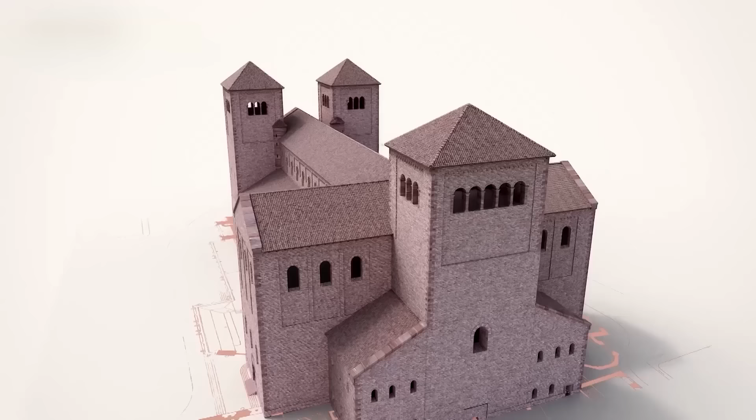After years of research, experts have been able to retrace in 3 dimensions the incredible history of this project, which took 4 centuries to complete. But how did the builders of the era defy the laws of physics to build higher and higher?

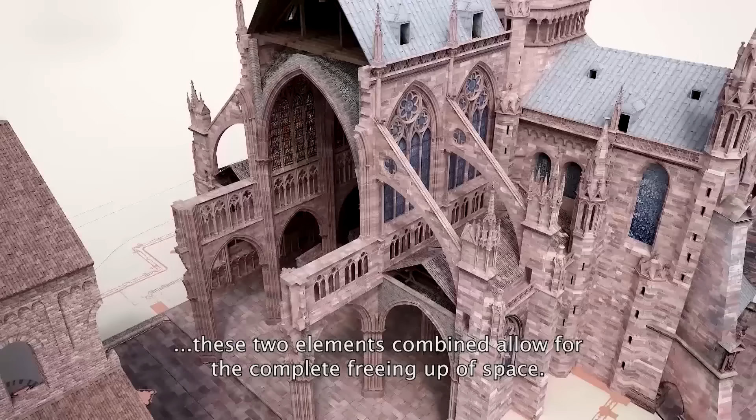And how did they attain this architectural precision without weakening the structure?

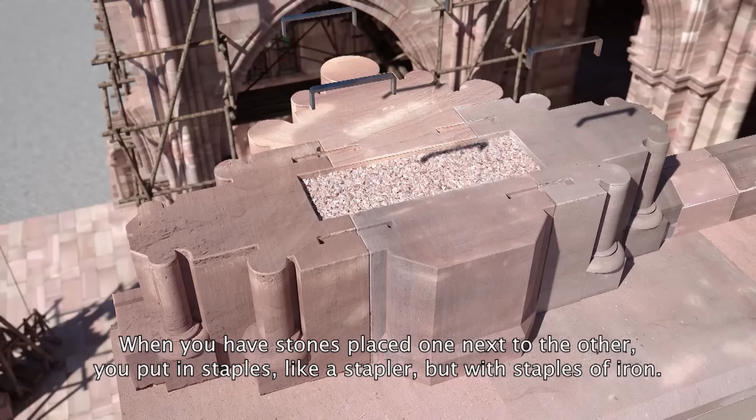The spire of this cathedral, which will come to dominate Europe until the 19th century, sparks the enthusiasm of researchers.

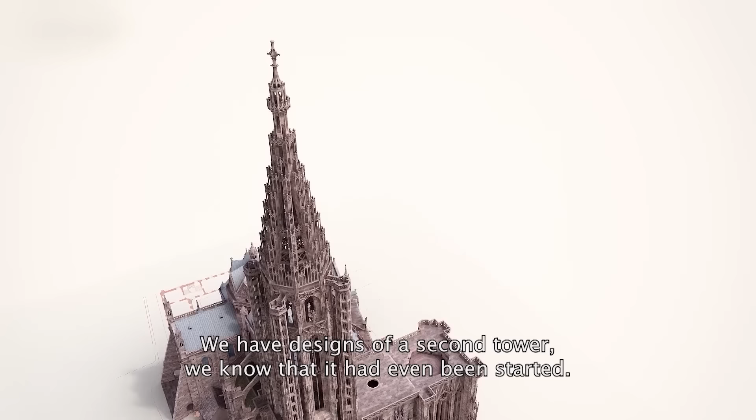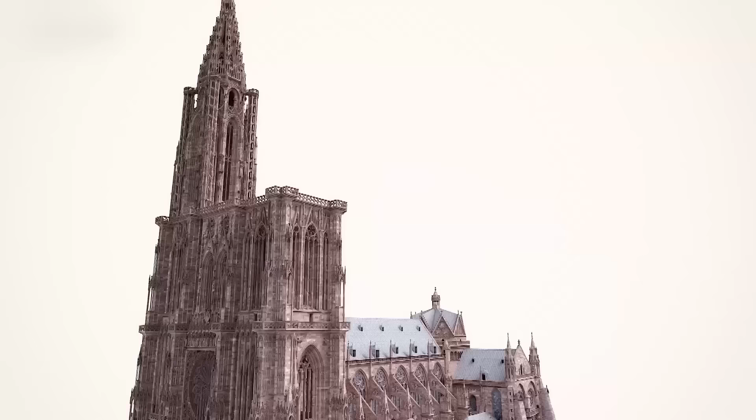Welcome to the Cathedral of Strasbourg, an exceptional project that took 400 years and enlisted the best architects of the Middle Ages.

A masterpiece of Gothic architecture, Strasbourg Cathedral is a one-of-a-kind monument.

Topped by its unique spire and adorned with a pink sandstone exterior, this cathedral has become the symbol not only of the city, but also the entire region.

Located on the border with Germany, the cathedral stands tall in the city centre, situated in one of the most historic neighbourhoods of the Alsatian capital of Strasbourg.

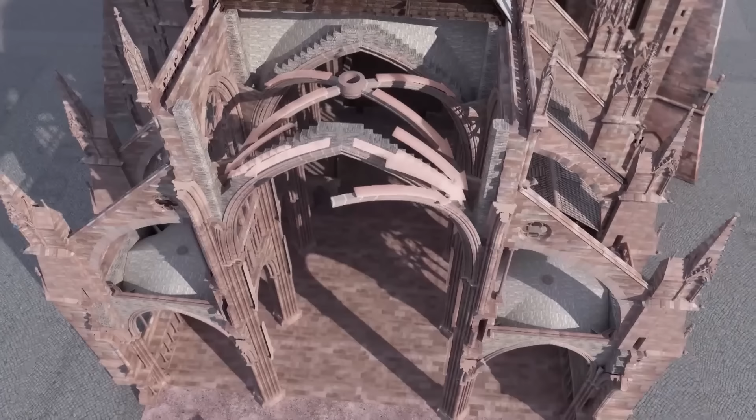To accomplish this, the weight of the building is directed to pillars supported at the exterior by flying buttresses and buttress walls. A real technological feat.

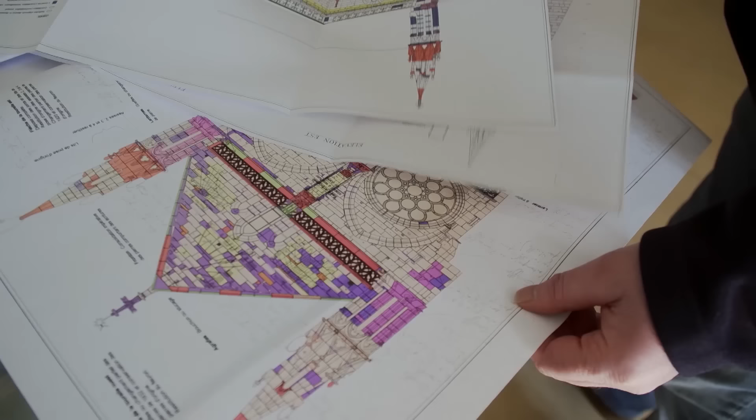Today, experts are trying to understand the construction techniques that were used in the Middle Ages to achieve such a feat. But the archives that would allow us to retrace the history of this project are lacking.

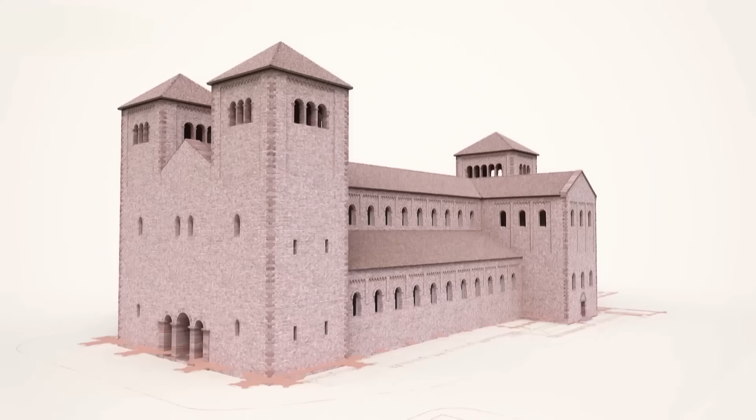With its thick walls and small windows, the original basilica was typical of the Romanesque architectural style, a rustic architecture that matches the technology and building techniques of the beginning of the Middle Ages, between the 10th and 12th century.

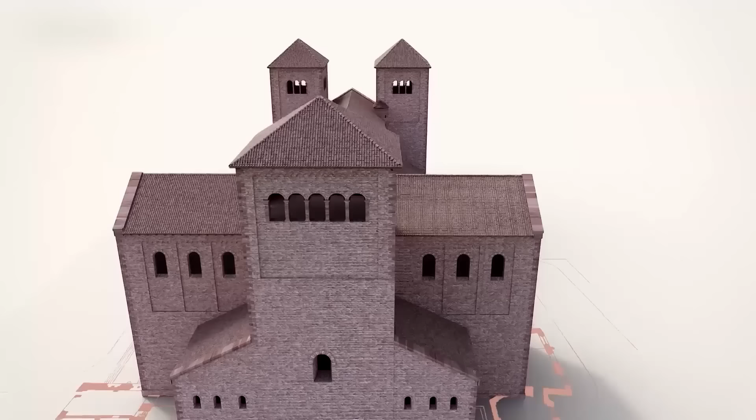But how did this original structure become the cathedral that we all know today? And above all, why was it transformed? The archives give us the beginnings of an answer.

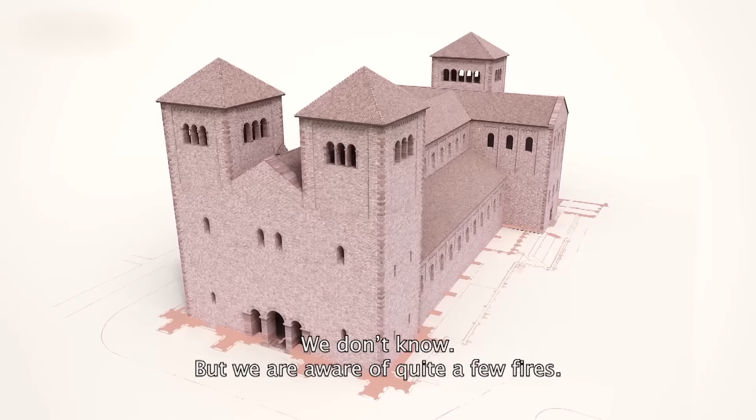The Romanesque cathedral is perhaps seriously damaged. In any case, it is decided to rebuild the building.

The project begins around 1180, and the first choice the builders make is to keep the existing foundations.

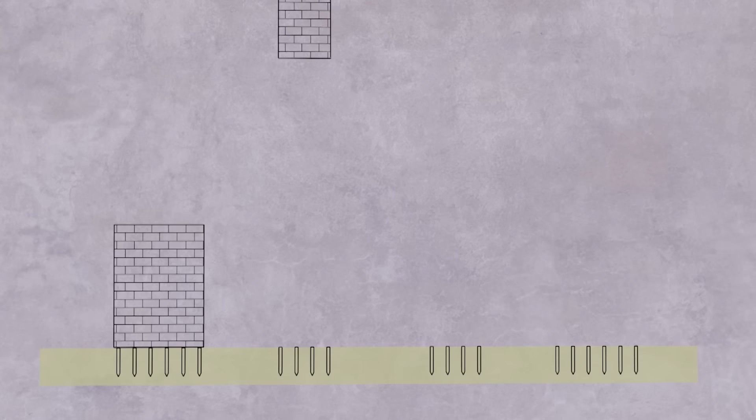These foundations are indeed colossal. Wooden piles were first driven into the underlying rock. To stabilize the whole thing, a layer of clay 2 meters thick was laid down. Finally, very thick foundation blocks were laid down. It is on these walls that today's cathedral rests.

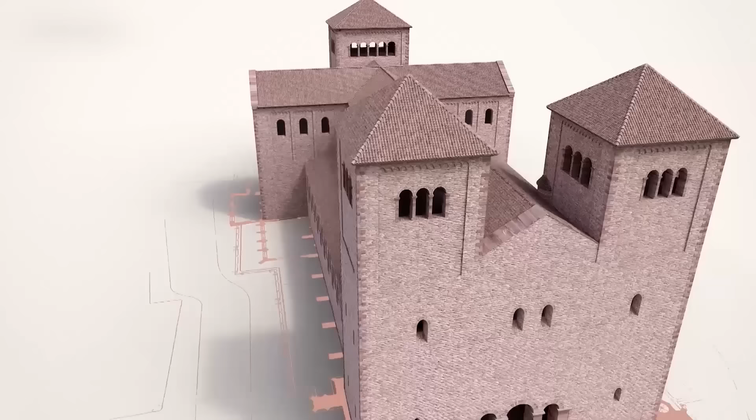The reconstruction of the cathedral began around 1180. The builders began on the north side of the transept. But at the same time, in France, Gothic architecture was in fashion, with its higher and more open buildings.

This style will dominate in the construction of the Cathedral of Strasbourg.

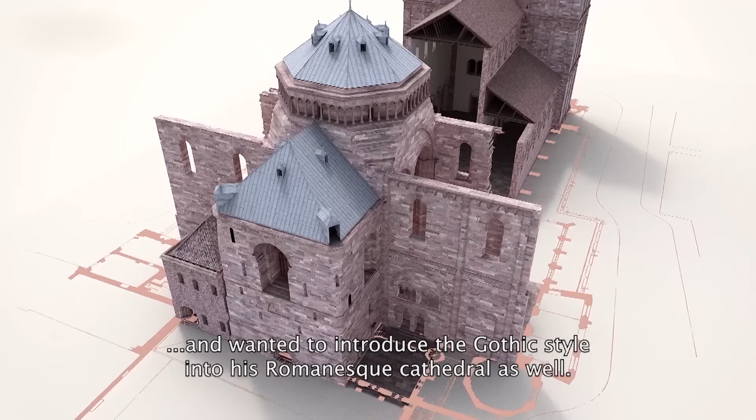The bishop called upon the best architects of his time. They come from France, where they had worked on some of the most prestigious construction projects, such as the cathedrals of Paris and Chartres.

Il faut bien comprendre que les architectes qui étaient appelés à Strasbourg, c'était les stars de l'époque. Les architectes étaient itinérants, ils voyageaient, ils étaient curieux, ils connaissaient, ils étaient dans des réseaux de maîtres d'œuvre, donc on partageait les connaissances, on volait le savoir de son concurrent.

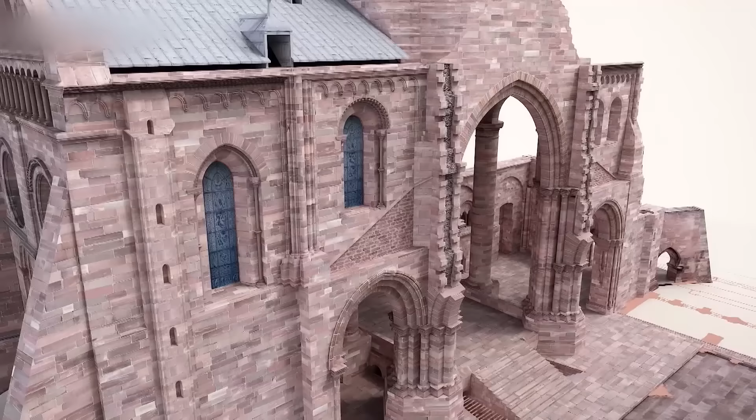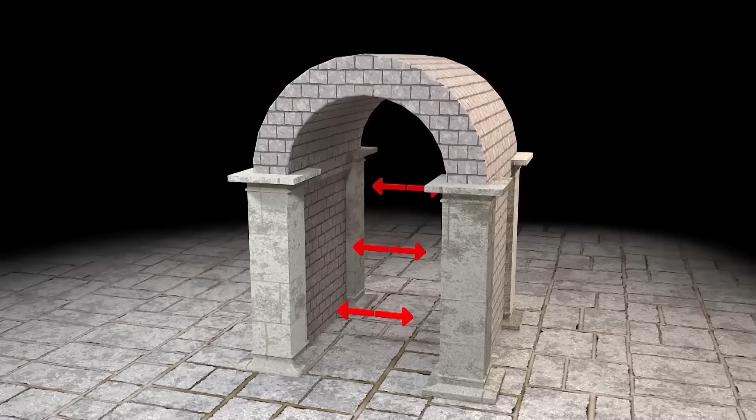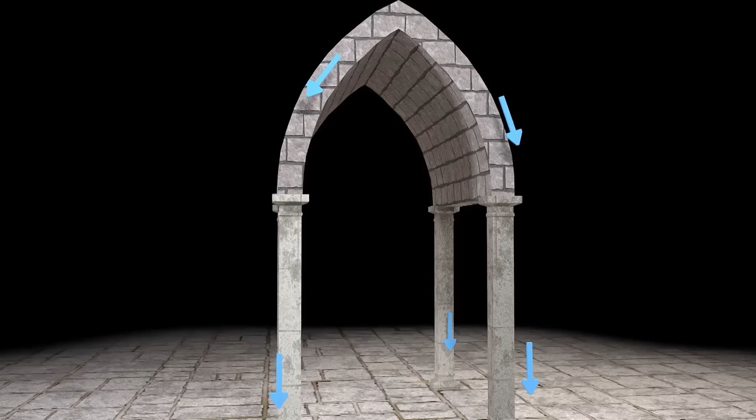These ingenious builders master the most advanced construction techniques, such as the rib vault. In the new cathedrals, the rib vault replaces the barrel vault, which was the only one known since antiquity. It is a real technical revolution. With its semicircular shape, the barrel vault exerts very strong force horizontally. Because of this force, the pillars had to be very thick in order to resist it. By transforming the semicircle into a pointed arch, the rib vault allows a new distribution of weight. This permits the pillars to be thinner and higher.

Quand vous arrivez sur de l'architecture gothique, les voûtes d'ogive, c'est des nervures qui sont montées en arc brisé. Et les arcs brisés, contrairement à un demi-cercle, si vous brisez, du coup la descente des charges de la voûte se concentre sur des points verticaux.

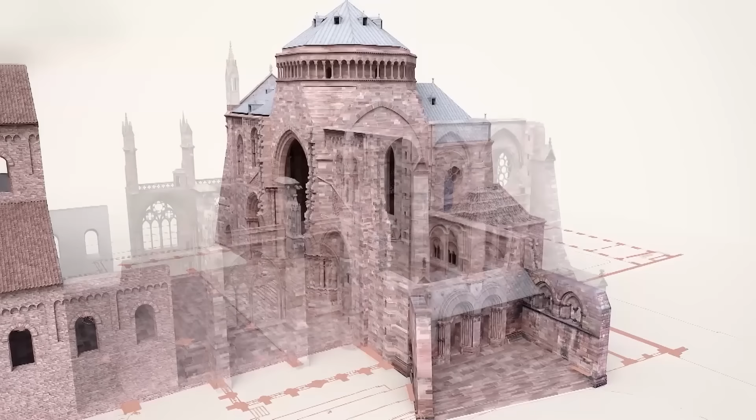When the Gothic architects arrived on the building site at the beginning of the 13th century, progress on Strasbourg Cathedral was already well advanced. Arrive le maître d'œuvre gothique, qui lui arrive avec un transept nord roman, un chœur roman, une abside romane et un transept sud qui est monté à moitié. Et il se retrouve avec cette problématique, comment on arrive à faire passer l'architecture gothique dans cet espace roman.

For the master builder, the challenge is to make the transition between two radically different architectural principles. To the north of the already built transept, the pillars are massive, following the rules of Romanesque construction. But as you look south, the appearance changes with the Pillar of Angels, much more delicate and typical of the Gothic style. This pillar is a true artistic and technological achievement.

L'architecte du Pilier des Anges, qui vient probablement d'Île-de-France, réalise des voûtes d'ogive parfaites dans le transept sud, supportées par le pilier des anges. Et le pilier des anges, c'est un chef-d'œuvre en termes de sculpture, sachant qu'à l'époque, l'architecte est très souvent aussi sculpteur. Et en plus, chaque statue fait partie de la colonne et elle aussi porte le poids des voûtes sur ce pilier.

It is the tour de force of the Gothic style, knowing how to transform structural elements into decorative ones.

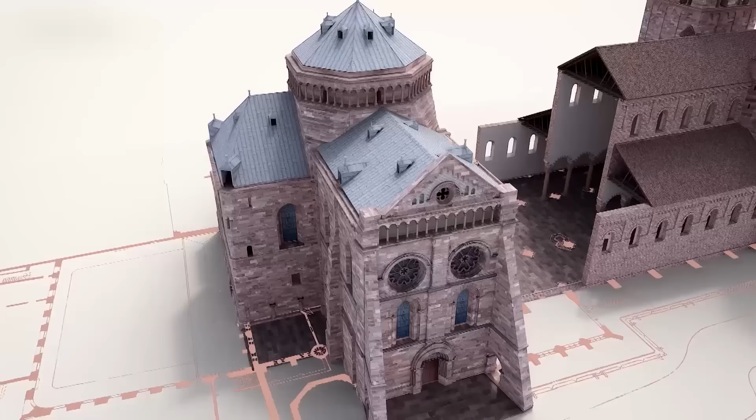À l'époque, toute la ville participe à la construction de la cathédrale. C'est les dons, les donations, les legs des Strasbourgeois qui permettent la construction de la cathédrale de Strasbourg.

These donations make it possible to set up an extraordinary building site. Its organisation challenges the preconceived ideas about the Middle Ages.

Alors les légendes de 300-400 artisans avec un bonhomme qui tombe toutes les 5 minutes de l'échafaudage, ça c'est vraiment des légendes. C'était des équipes beaucoup plus petites. Sur les cahiers qui référencent en fait les ouvriers, on n'a jamais plus de 50 personnes sur le chantier.

The first stage of the construction site is in the quarry. There the workers extract sandstone, the local material used to build the whole building. The next task is to transport the sandstone to the cathedral, a daunting task as the largest blocks of stone can weigh up to a ton.

Ces éléments arrivent sur des chars tirés par des bœufs, donc imaginez le travail, la traction, les routes ne sont pas bitumées, donc c'est un travail colossal. Ils arrivent au pied de la cathédrale.

A stone cutting workshop is set up on the site. It will allow the craftsmen to work all year round, regardless of the weather conditions. Les tailleurs de pierre vont préparer les blocs pendant l'hiver dans un atelier couvert chauffé et ils vont poser toutes ces pierres qu'ils ont préparées pendant l'hiver en été sur le chantier. Ça, c'est la nouveauté avec cette installation d'un atelier fixe à Strasbourg au XIIIe siècle.

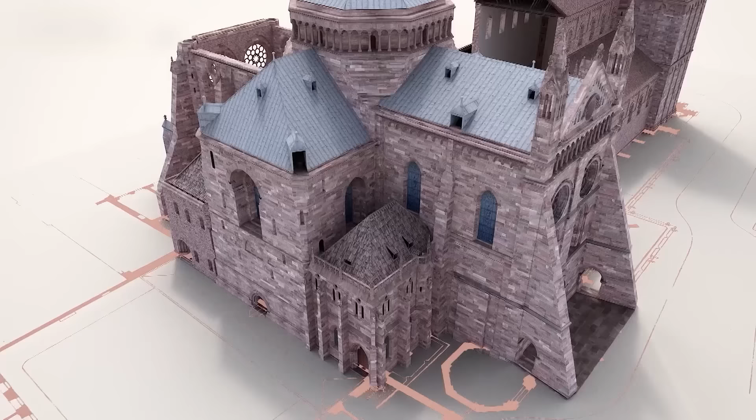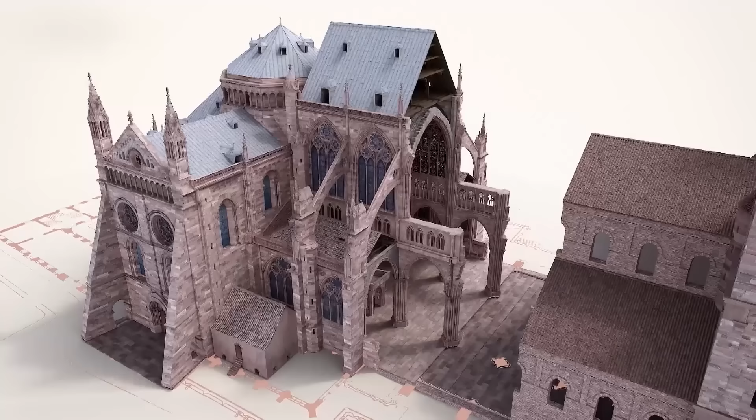Around 1235, work began on the nave. The architect wanted to achieve the impossible, to raise the walls higher and higher to let the light in, and to extend the space inside the cathedral.

On relève en permanence des défis pour monter les voûtes plus haut, pour faire des fenêtres plus grandes, permettant de réduire la matière au maximum de ce qu'il est possible de faire avec de la pierre de taille. Once again, the rib vault will enable them to meet this challenge.

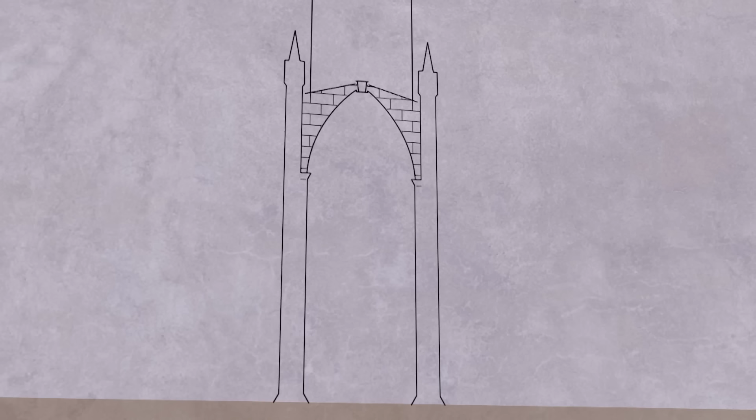This construction technique directs the weight of the vault to the pillars. This way, the walls are not load-bearing and can accommodate large openings without the risk of weakening the building. On the outside of the building, the builders will place a flying arch combined with a buttress to direct the horizontal force towards the ground.

Le principe de l'arc-boutant, c'est tout simplement une échelle qu'on appuie contre un mur, qui vient pousser vers la façade, et donc qui vient équilibrer simplement les charges entre la poussée de la voûte d'ogive et l'arc-boutant. Les arcs-boutants, en fait, ont permis de monter les murs beaucoup plus haut et d'alléger la structure pour laisser passer la lumière.

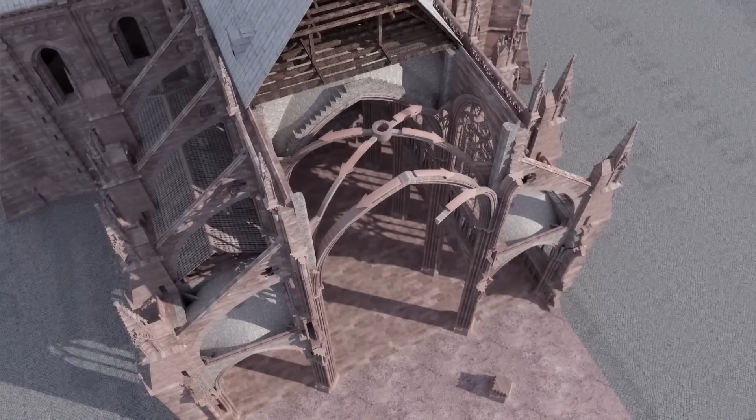Thanks to this complex system, the builders achieved a tremendous feat. No more thick walls and small Romanesque style openings. The genius of the architects of this Gothic period was also their success in combining practicality with aesthetics, as evidenced by the 12 buttresses on either side of the nave.

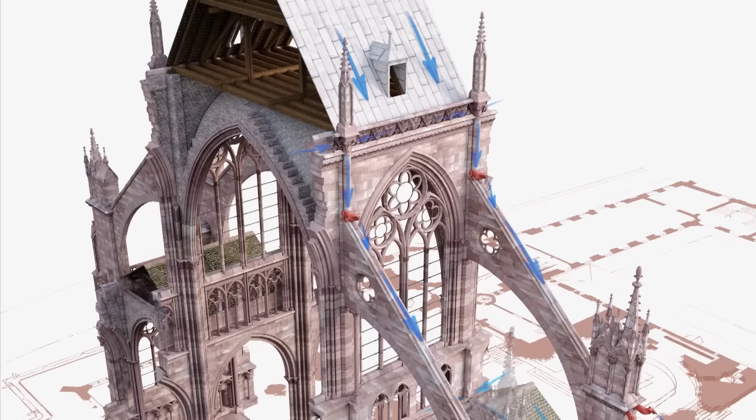They also have another function. They cleverly conceal a complex system of gutters. Throughout this network, gargoyles allow rainwater to be drained off.

But the placement of these flying buttresses has another use, this time inside the cathedral. Les arcs-boutants qu'on trouve très beaux à l'extérieur, ils sont faits pour dégager de l'espace intérieur et permettent de reporter plus loin la poussée des voûtes pour dégager l'espace intérieur.

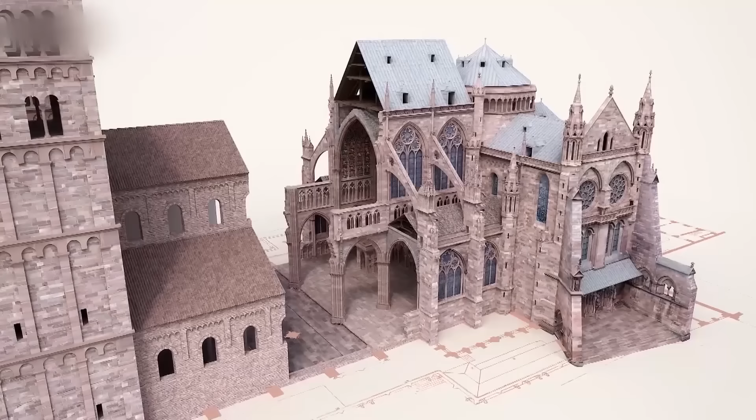As a result, the dimensions of the nave are impressive, 36 meters wide and 40 meters long. The vaults are 32 meters high, the equivalent of a 10-story building.

Grâce à la voûte d'ogive et à l'invention de l'arc-boutant, ces deux éléments combinés permettent de libérer complètement l'espace des parois latérales. With the Gothic style, the walls disappear in favor of large openings. Consequently, Strasbourg Cathedral has 1,500 square meters of stained glass windows.

Dans la cathédrale, quand vous regardez la nef, il n'y a que des vitraux. Il y a la structure en pierre, mais elle est vraiment minimalisée. Elle est juste là pour tenir, pour être la structure du bâtiment.

In order to extend this extraordinary building up to dizzying heights, the builders have to redouble their ingenuity. One material will enable them to make their wildest dreams come true: iron.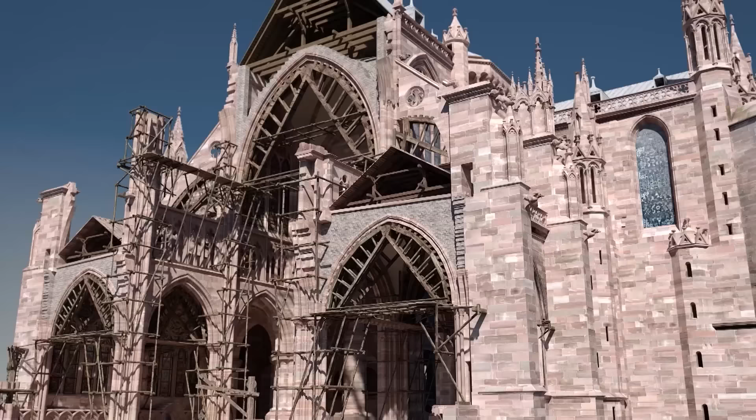Si vous regardez bien les cathédrales, c'est du métal habillé en pierre. Il y a des tonnes et des tonnes de métal dans la cathédrale. In Strasbourg Cathedral, iron is omnipresent. This almost invisible skeleton is essential to the building structure.

In these pillars, for example, the builders stapled the stone blocks together and then cast lead to secure them. Quand vous avez des pierres posées les unes à côté des autres, vous mettez des agrafes, comme une agrafeuse, des agrafes en fer, qui viennent, elles, solidariser les pierres les unes avec les autres.

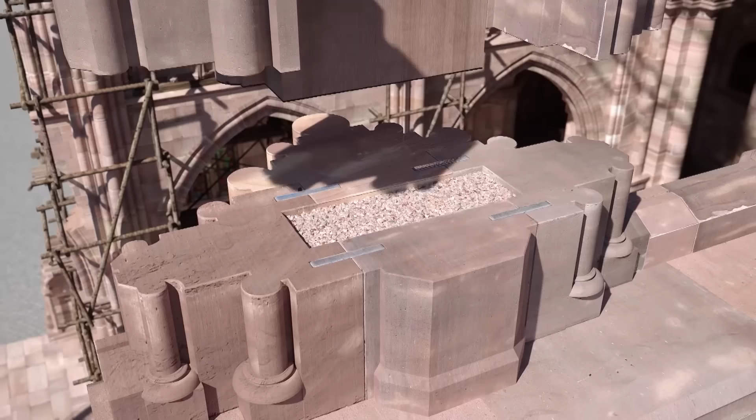This ensures that the components are firmly attached to each other. This innovation, which makes it possible to go bigger and higher, is known as chainage.

On sait que la construction gothique était intrinsèquement liée au principe de chaînage métallique. Le chaînage, ça évite que le bâtiment vrille sur lui-même ou qu'il vacille comme ça. Ça lui permet de se stabiliser au niveau des angles. Ça le rigidifie.

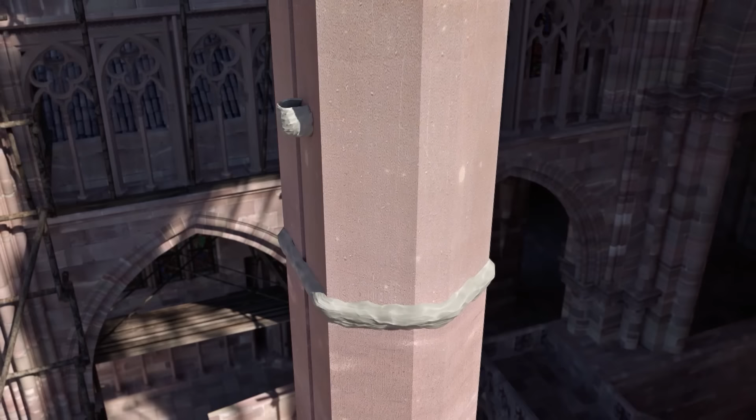It is also thanks to the chainage that the builders would be able to build these huge windows. The technique consists of making slots in a block of stone, then a hole to place an iron bar. Wedges are arranged at the four corners. The top component is fitted into the bar like a Lego piece. A clay seal is then laid, and in a specially made duct, molten lead is poured to seal it together.

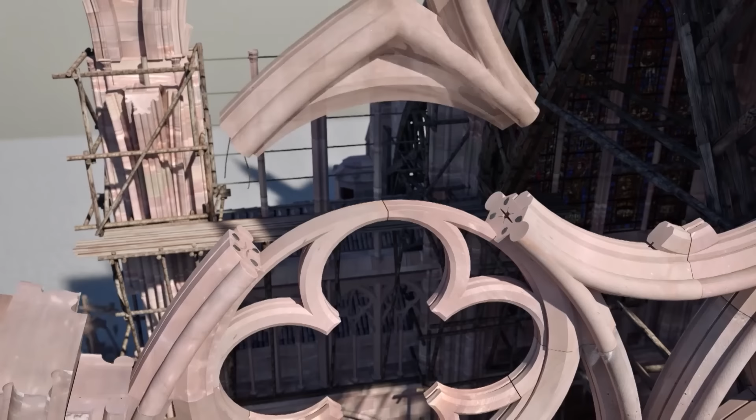Unfortunately, on some complex parts, iron bars cannot be added. The builders came up with an ingenious system. The bar is inserted completely into the component, which can then be put into place without difficulty. Then simply slide the bar with the help of a rope to put it into the second piece. Here the bar is placed and the components supported. All that is left to do is to pour in the lead to seal the assembly.

This method illustrates the incredible know-how of the Gothic builders.

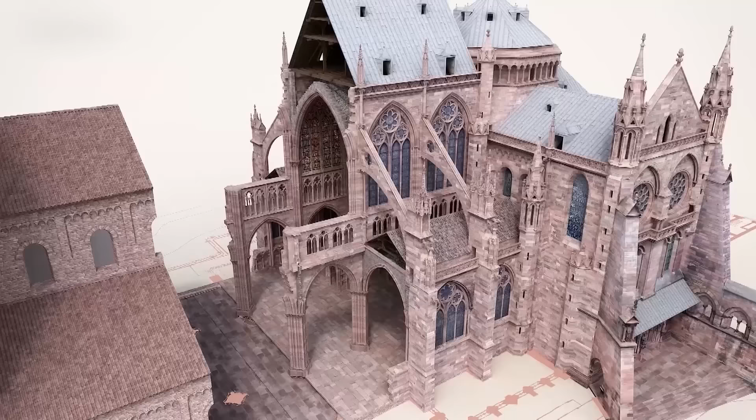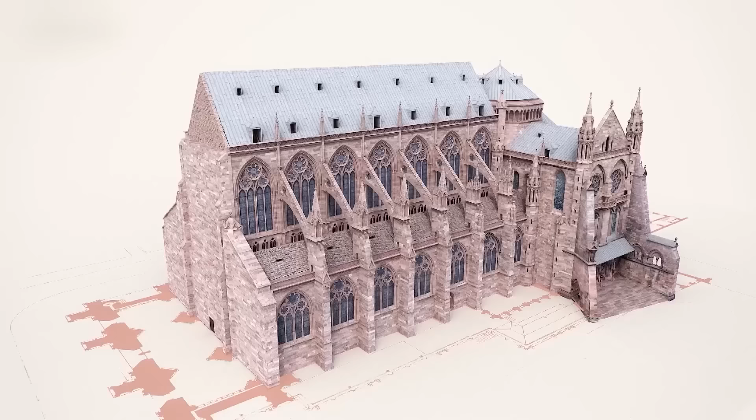In 1275, the nave of the Cathedral of Strasbourg is finally completed. It took 40 years of work to achieve this architectural feat. And even if the building is still far from being finished, the builders are on the verge of succeeding in their gamble of creating a cathedral of light.

2 years later, the architects are tackling the construction of the facade, an even more ambitious challenge.

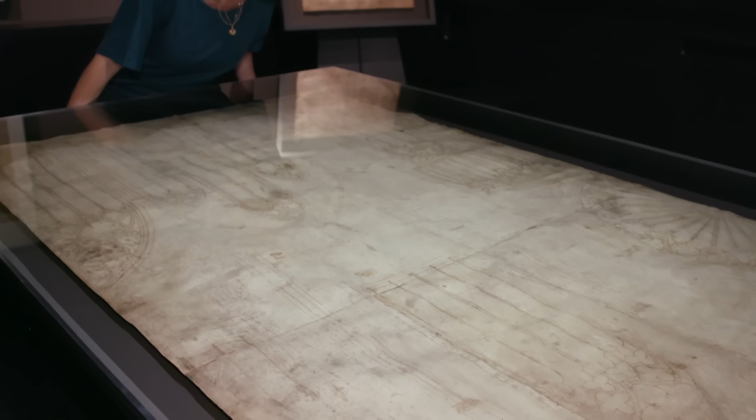A stone's throw from the cathedral, a room with perfect temperature and humidity protects a priceless treasure. It is here, sheltered from the light, that the first architectural drawings of Strasbourg Cathedral are conserved. The oldest date back to the mid-13th century.

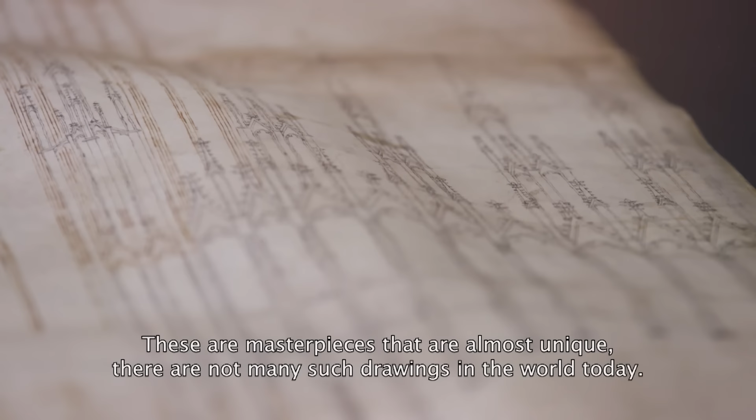This exceptional collection, composed of about 30 drawings, is one of the most important in Europe. These architectural plans are neither dated nor signed, but according to experts, this plan, called Drawing B, dates back to 1260.

This extremely rare drawing is precious because it shows the project of the Gothic facade to come.

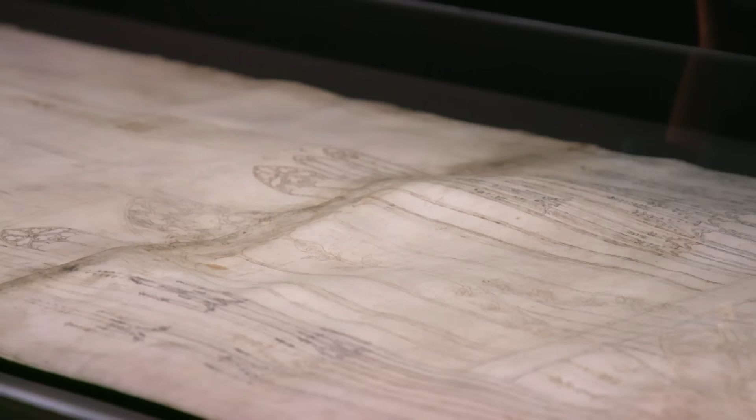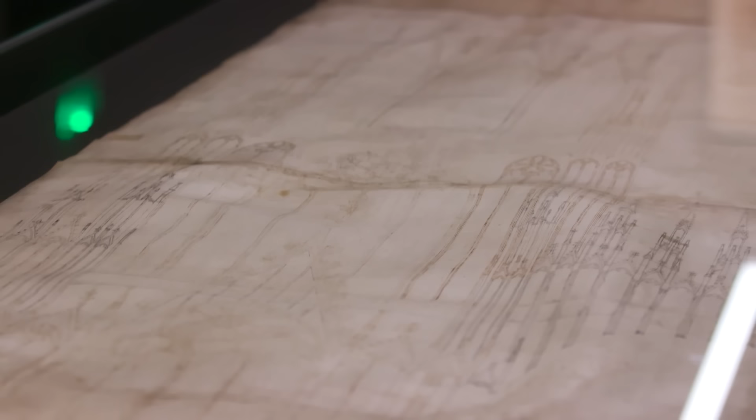Drawing B is almost 3 meters long and 1 meter wide. Despite its intimidating size, it shows only half of the cathedral's facade. For researchers, the reason is not technical, but economic.

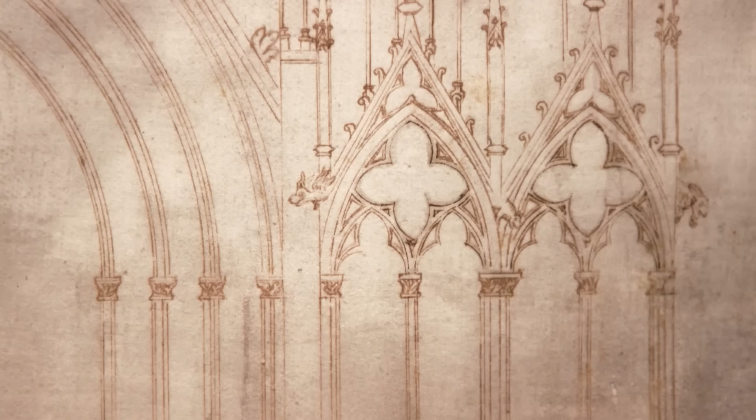As the facade is strictly symmetrical, half of the plan is sufficient to give the necessary indications to construct the entirety. This masterpiece had above all a technical use.

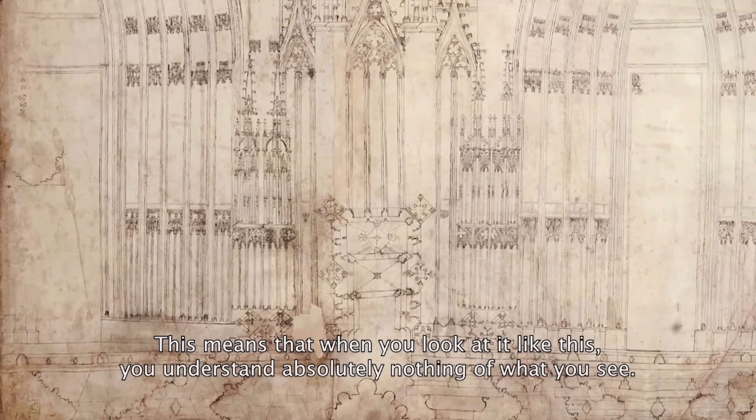Drawings of such complexity that they will become difficult to decipher by the uninitiated.

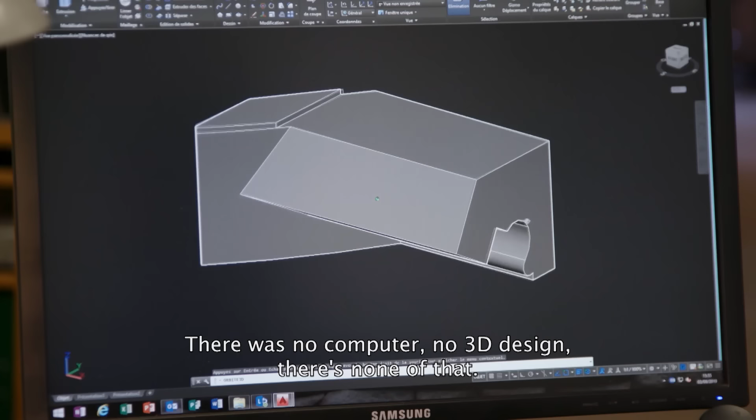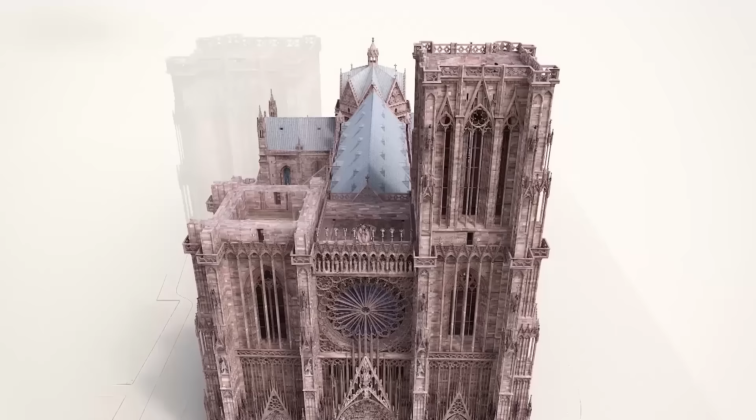The result is a unique architectural achievement. Three portals make up the base of the facade. Above them is a huge star-shaped rose window, considered to be one of the most beautiful of all Gothic cathedrals. Two towers are put on top. Started around 1277, it will take nearly a century to complete this titanic project.

This incredible facade is now attributed to Erwin, known as von Steinbach. He is the first known architect of the Cathedral of Strasbourg. His plans are so sophisticated that they had to be explained to the craftsmen to complete the work. This was the role of an indispensable man, the parlier.

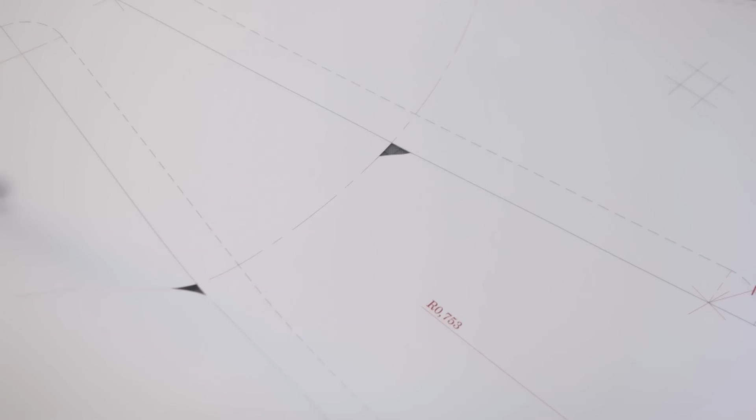In the attic of the cathedral, the parlier will draw the most complex parts on the floor, such as the huge rose window.

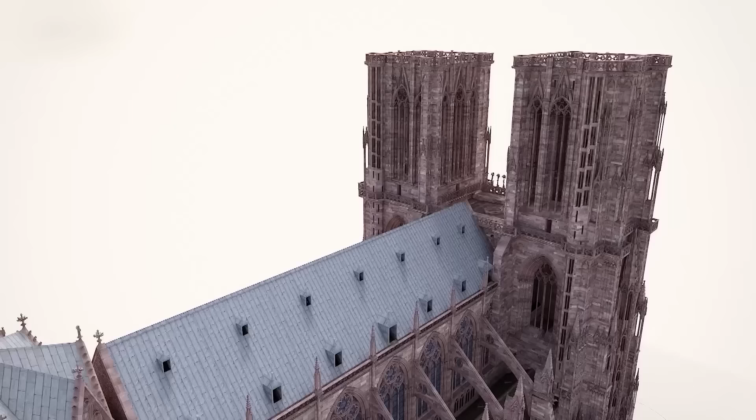All around this rose window, detailed decoration adorns the monumental facade, which culminates at 66 meters in height, the same height as a 20-story tower. In spite of its imposing size, the facade exudes a feeling of lightness. This lacework of stone is made of pink sandstone.

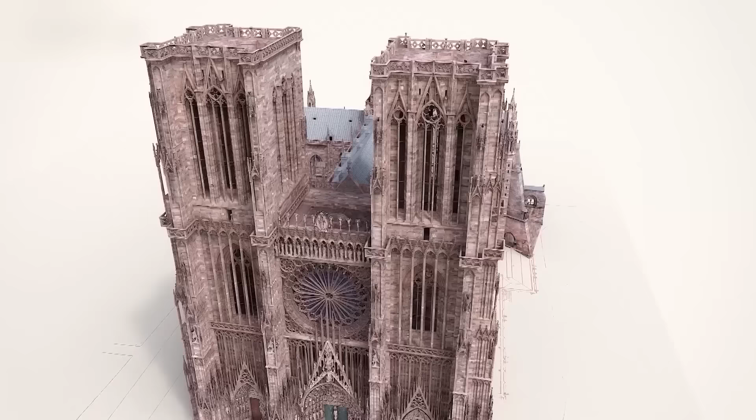To fix the decoration of the facade in place, iron had to be used again in abundance. A system of bars embedded in the wall and connected to bands holds the assembly firmly in place. The facade was completed in 1371.

The new building no longer has much in common with the original cathedral. The builders are on the verge of completion with their ambitious project. What remains is the last act of this construction site: the building of 2 spires. This is a huge challenge because the slightest miscalculation would reduce centuries of effort to nothing.

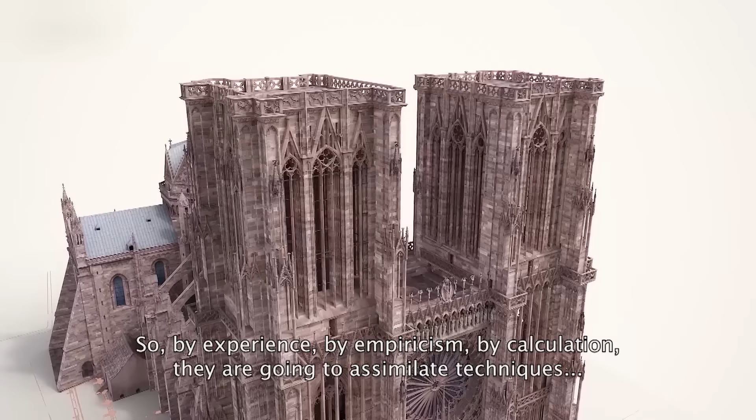But in Strasbourg, everything will change. While the top floor of the North Tower is being built, the neighbouring city of Freiburg is raising a 116-metre tall spire that surpasses the one planned by Strasbourg. The master builders were stung by this development and decided to increase their own architectural audacity.

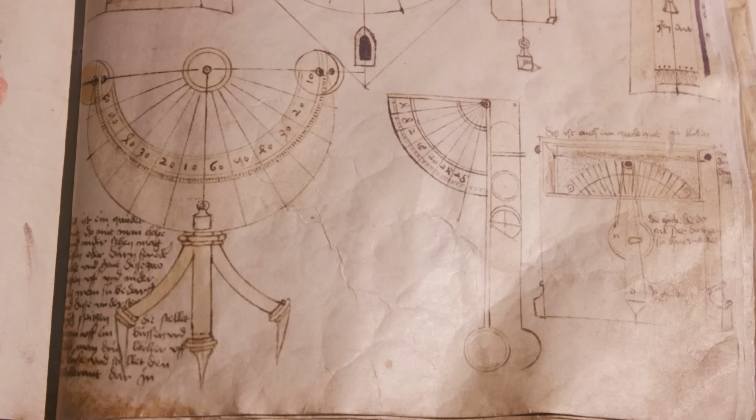Men will have to move blocks of stone weighing up to a ton with just their human strength.

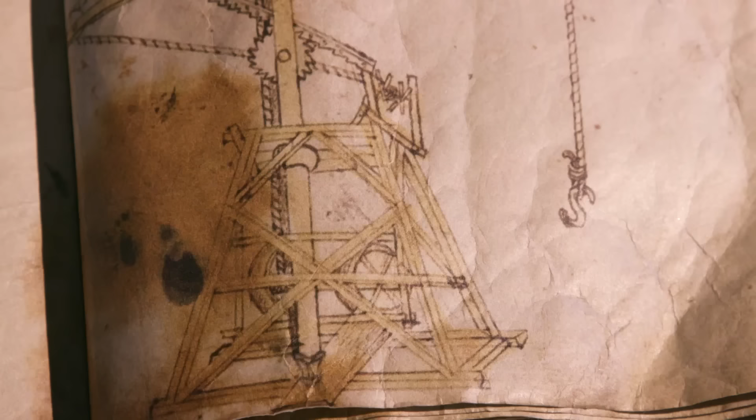A sketchbook dating from the end of the 15th century tells us that there were many lifting machines on the Strasbourg Cathedral construction site. The most powerful of them was the hamster wheel. A specimen is preciously preserved at the top of the second tower of the cathedral.

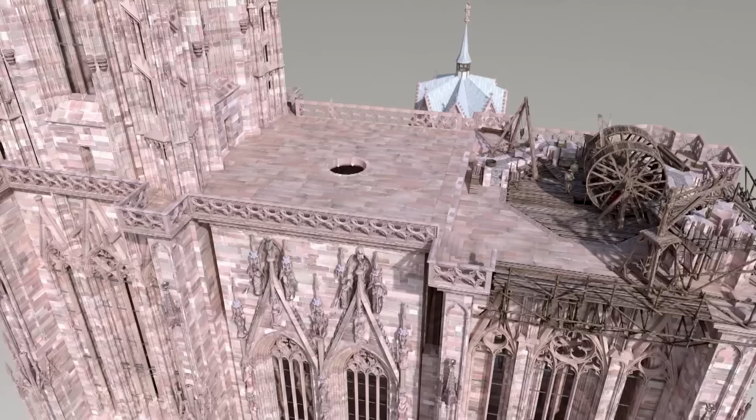This hamster wheel-like machine is located at the very top of the second tower, 66 meters high.

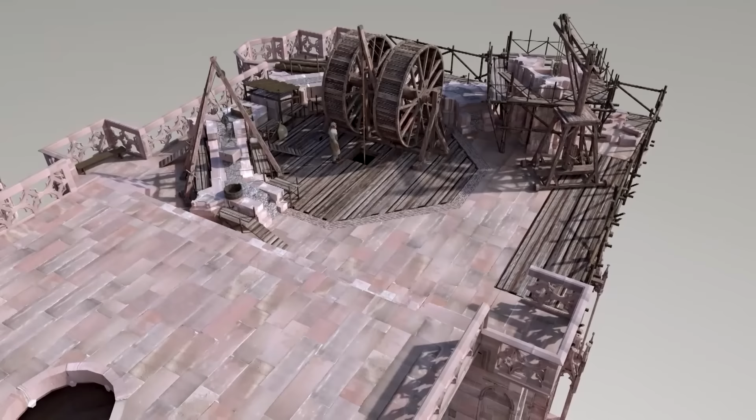The machine works in the same way a crane would do today. However, the lifting power is provided by walking workers. The system allows blocks up to 2 tons to be lifted. Thanks to these surprisingly efficient construction machines, the work on the spire advances quickly.

The first challenge for the architect is to build a spire in harmony with the tower.

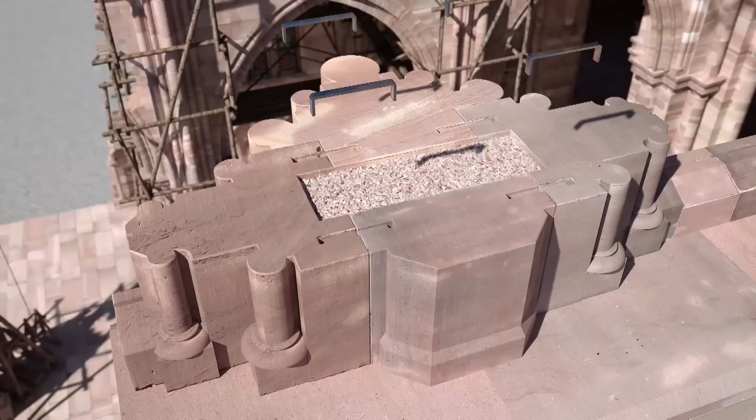To alleviate this pressure, the miracle solution is again using iron. Once again, builders staple the larger blocks of stone and solidify the thinner elements by inserting lead-soldered metal bars inside. Finally, as with the facade, each component is carefully embedded and reinforced.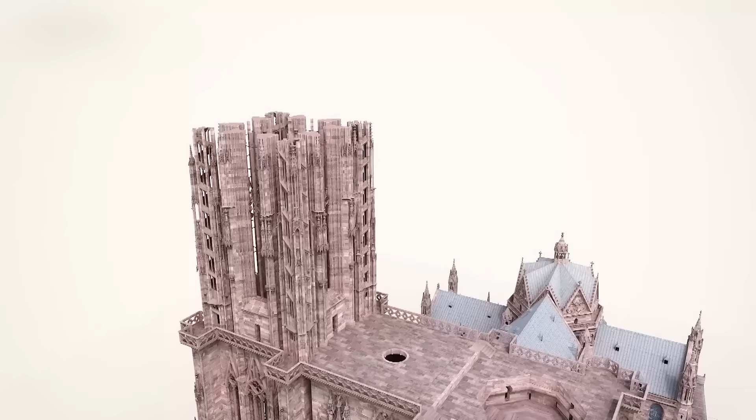The first part of the construction was completed in 1419, but as the base of the spire was just being finished, the architect died. The work then takes a new turning point.

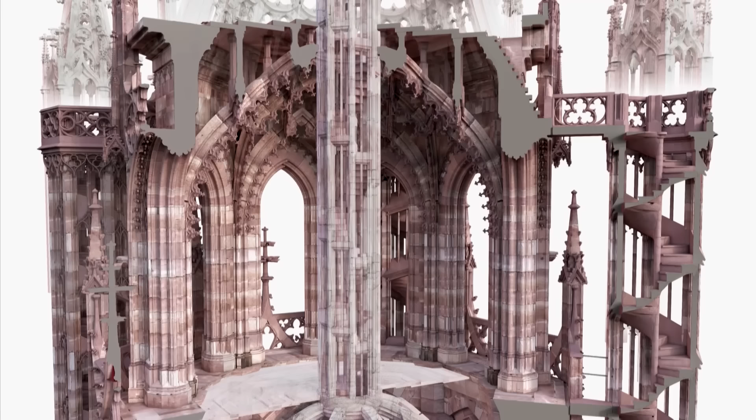As with all cathedrals in France, a single spiral staircase had to be installed in the centre in order to reach the top of the spire. But Jean Hültz is going to break with this established tradition.

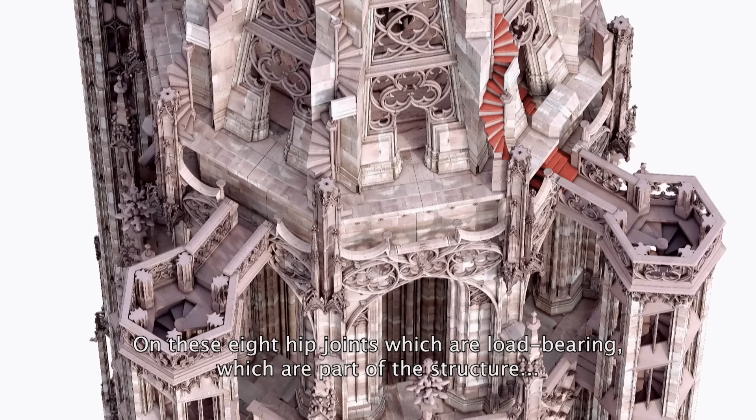The concept of the cathedral spire has simply been reinvented in Strasbourg.

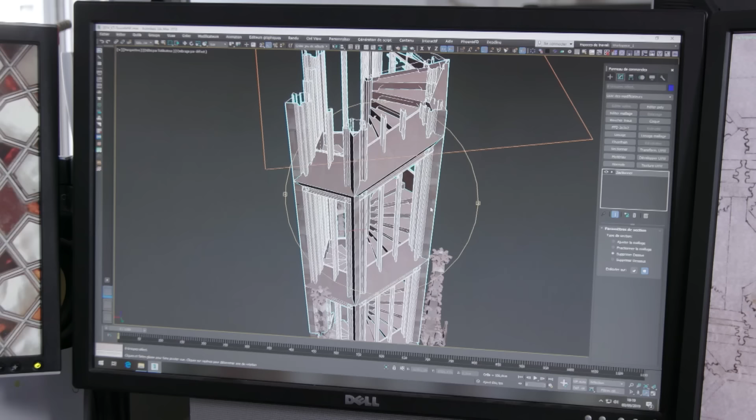On the construction site of Strasbourg Cathedral, this method would be implemented for the first time. The wooden models are made by a carpenter working in close collaboration with the architect. Two crests testify to this organisation.

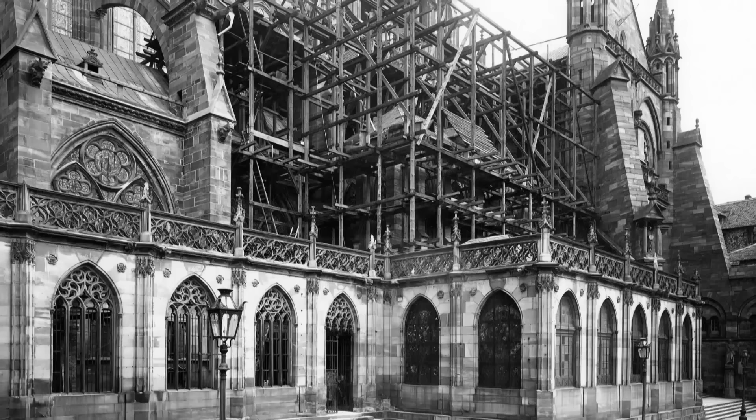It is thus perhaps the arrival of the Reformation in Strasbourg that stops the construction of the cathedral during the first half of the 16th century. But the scaffolding has never really disappeared since then, because this extraordinary monument requires constant restoration work.

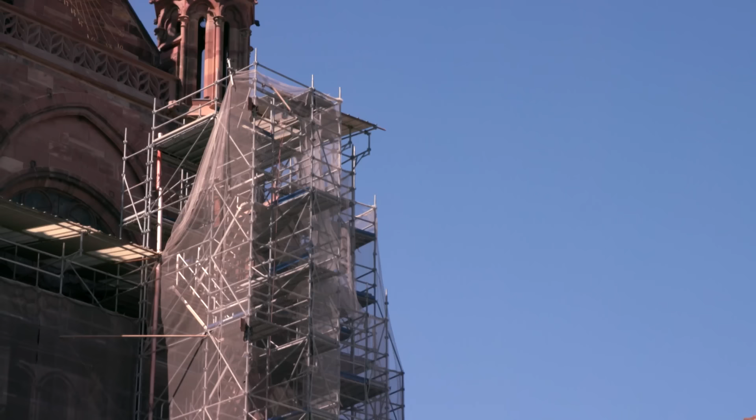Every time the specialists ask themselves the same question: should what has been damaged be replaced, or should the original materials be preserved for as long as possible?